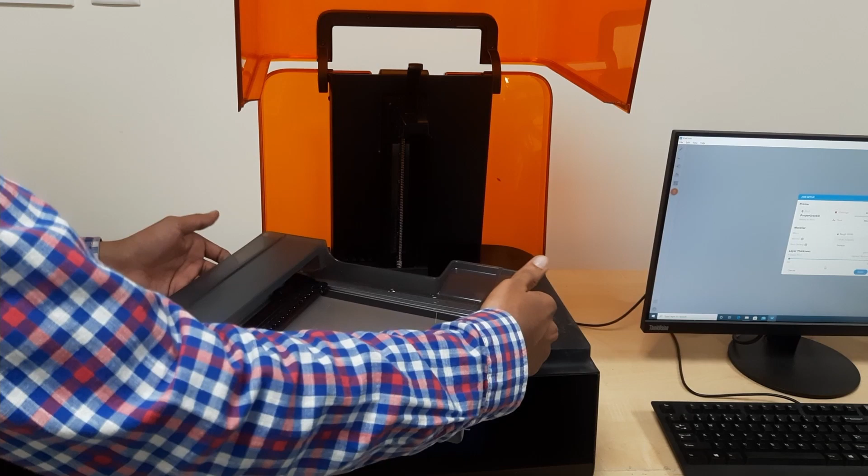Okay, so now we are going to insert this liquid tank inside this printer. You can just simply insert it like this. So now this is the print bed. Next we are going to install this print bed inside this printer. Lock this. So now this is the cartridge that contains the photopolymer, and we are going to install this inside this printer. It can simply slot in like this. Okay, so now the printer has recognized that all these three things are inserted inside this machine, and it is ready to print.

So this is the software aspect of this printer. This printer uses a software which is called Preform. The general sequence of the steps or the general procedure remains the same that we discussed earlier. So you have an STL file, you generate the support structures of the STL file, then you slice that STL file, generate the contours, then select an appropriate area filling strategy, and then you print the part. So overall that sequence remains the same, but the GUI is slightly different in this case.

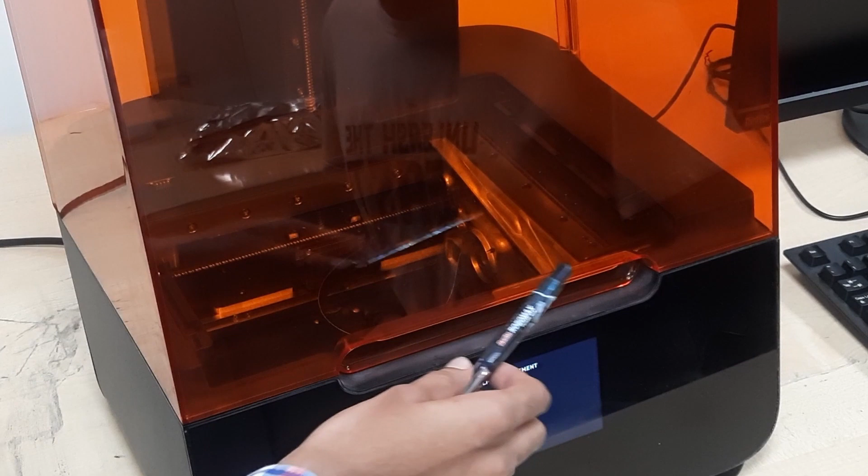Another thing that you can notice is that this is the optics here. This is what does the scanning, this is what actually guides the UV, the ultraviolet laser onto the selective areas to cure the resin. I'll put in a PowerPoint slide here to explain how it works, but basically it has a single galvanometer to provide the motion of the laser beam in the y direction, and then the entire head moves along x. So you have y scanning with the help of the galvanometer mirror, and then you have the entire movement of this optics along x to achieve the scanning in the x direction.

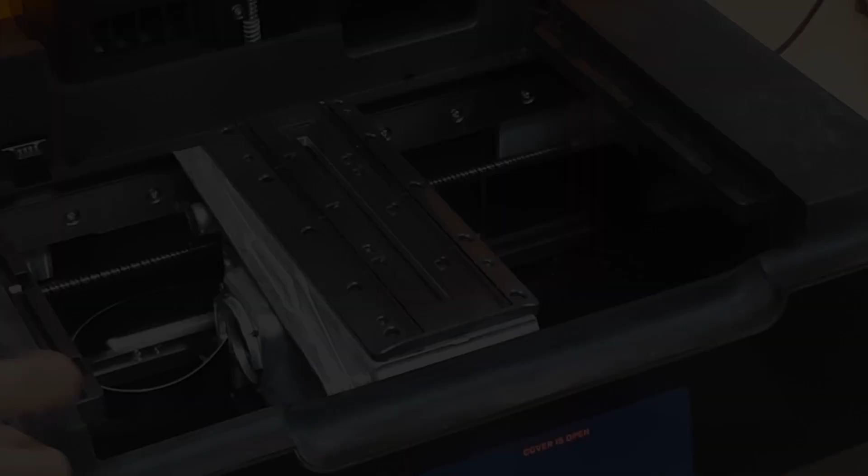Now we have opened this lid so that we can get better access to this scanning unit. You can see that this entire thing is the scanning unit, and this entire scanning unit moves along x. This is the ball screw which guides this entire scanning unit along the x direction. But for the scanning in y, we have the galvanometric system, and you can notice that this black part is actually the galvanometer. So the laser comes from the top, then the laser is guided onto the galvanometer, the mirror tilts, and then it deflects the light upwards. And then we have this narrow slit. Through this narrow transparent window, the light comes and it projects onto the photocurable resin.

Another thing that you can notice is that the scanning unit has two rollers here. These rollers slightly press on the flexible tank that we have, and it slightly bows the flexible tank upwards. That helps in the peel away process, or the removal of the part from the optical window. And this technology is called LFS technology, or low force stereolithography technology.

So in order to have a better understanding of the Formlabs stereolithography apparatus and its light processing unit or scanning system, let's look at this presentation. Here you can see that this is the light processing unit, or the scanning system of the Formlabs SLA. This transparent glass window that you see is the window from which the UV laser projects onto the print bed. If we were to look inside this light processing unit, we will find four key components. The first one is the laser. This is the UV laser. The second one is the galvanometer. The third is the fold mirror.

And then finally we have this parabolic mirror. So this laser light which comes from this unit is directed onto the galvanometer. The galvanometer appropriately tilts and then reflects it to this fold mirror. Subsequently, from the fold mirror, the laser beam is reflected to the parabolic mirror, and from the parabolic mirror, the light is reflected onto the transparent window from which it emerges out and then projects onto the print bed. The motion of this galvanometer controls the scanning in only one direction.

Let's assume that it controls the scanning in only Y direction. For the scanning in X direction, this entire light processing unit traverses, it moves back and forth on this lead screw. So one can think of this light processing unit or this scanning system as a hybrid scanning system where we have the galvanometer to achieve scanning in one direction, and we have the flying optics which achieves scanning in the other direction.

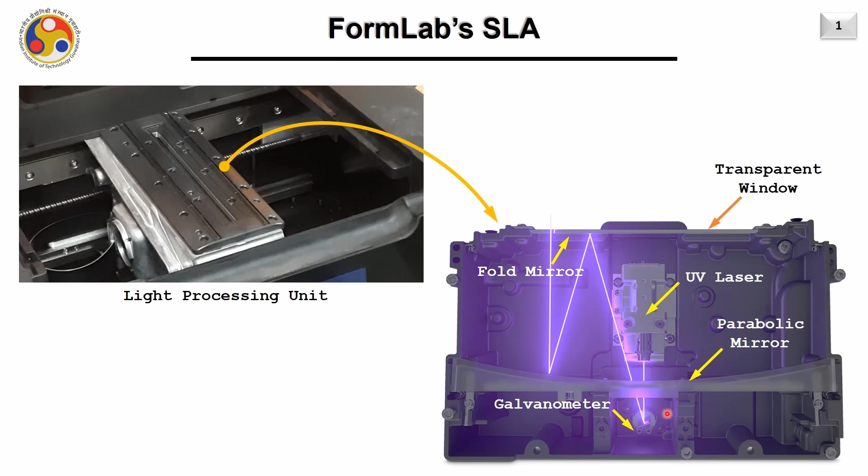Also, this parabolic mirror ensures that there is no beam distortion when the laser beam emerges from this transparent window and projects itself onto the print bed. So this parabolic mirror ensures that this laser beam remains perpendicular to the print bed as far as the scanning in Y direction is concerned, which is taken care of by this galvanometer.

So these were some of the parts that we modeled and fabricated. So you can see that we have nested the parts. So several of these parts are placed on the single print bed and they were fabricated all at once. This blue color part you see is actually the part that we want, and then the gray color part is actually the support structure.

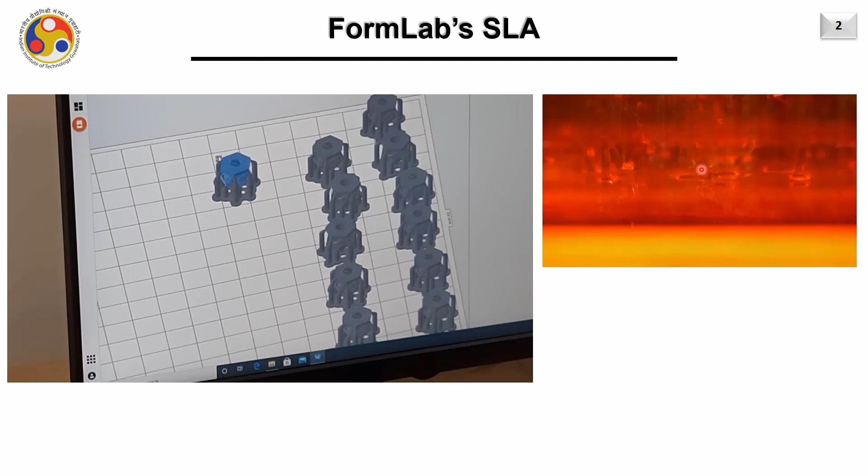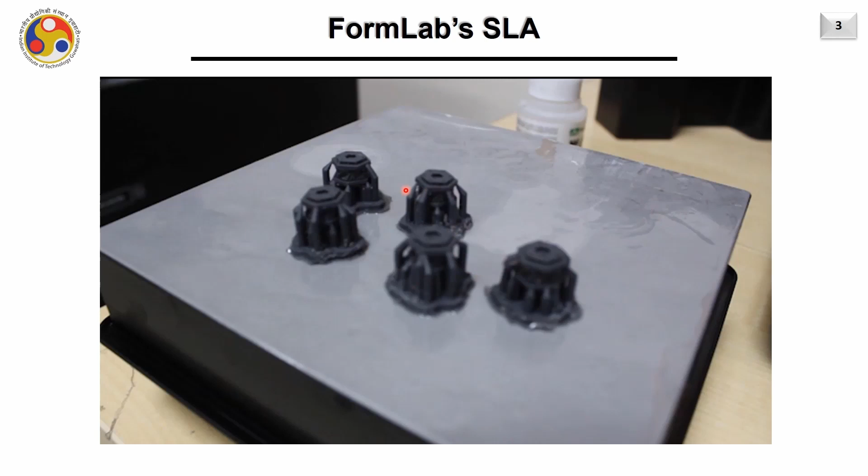So once we have modeled the part and we have set all the process parameters, we send the file to the 3D printer for printing, and here you can see that this is the laser beam which scans appropriately and it builds the part. So these were the final parts that were printed. You can see that this is the build platform and then these are the parts, and these parts were printed upside down. So with this, I conclude this session on Formlabs stereolithography apparatus.

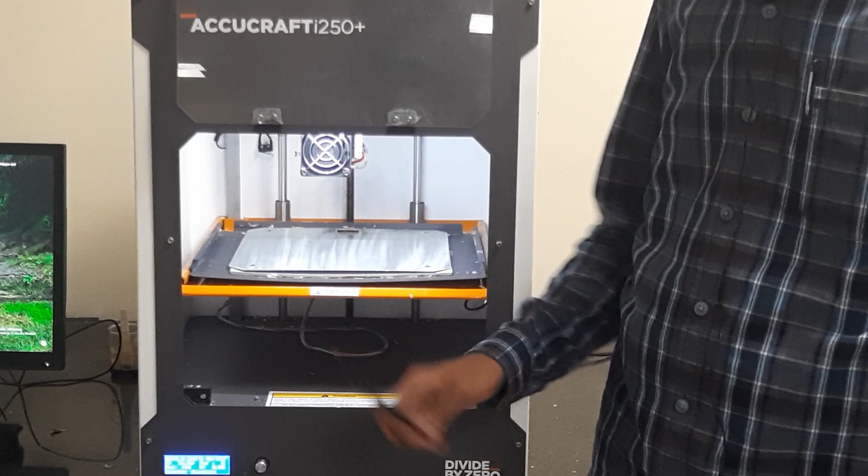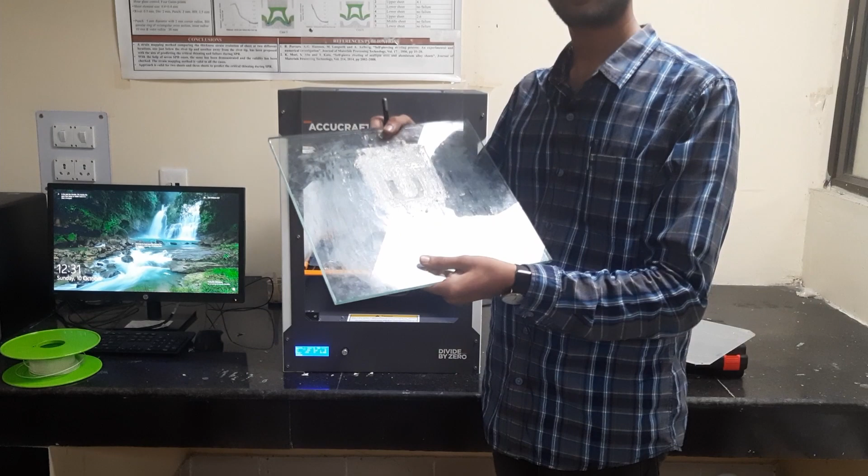And we can also operate this machine remotely. So you can see that this is the X and the Y motion which is associated with the print head. And we can also see the Z motion which is associated with the print bed. Okay, so the print bed is a heated print bed, and this is a glass print bed. I can show you that this is the print bed here. This is a glass print bed on which we extrude the material and deposit the part.

So as we have previously discussed in week 6, these types of 3D printers use wire form of feedstock. So today we are going to be using an ABS feedstock which is in the wire form, and I have that feedstock here. So this is the feedstock. It is in the form of wire, and the diameter of this feedstock is 1.75 mm. So this feedstock is going to be fed into this print head.

So first it is going to go through the pinch rollers, then into the liquefier, and then from the liquefier it is going to be extruded from the nozzle. The nozzle has an outlet diameter of 0.4 mm.

Before we install the print bed, which is a glass print bed, and show you the procedure which we use to ensure that the first layer sticks to this print bed, I will show you how we can load this filament into this 3D printer. To load this filament into the 3D printer, I am going to slightly cut this filament at an angle of 45 degrees so that it will be easy for me to guide this through the tubing.

So to do that, I have a cutter here, and at an angle of 45 degrees, I am going to slightly snip this filament. You can see that now it has a sharp tip, and then it will be easy for me to guide this inside the tubing.

So this is the back side of the machine, and this is the filament spool. I am going to simply put this filament on this spool, and now this filament has to be fed inside this 3D printer. You can see that there is a slight outlet which has a tubing. So I am going to take this filament and feed it inside this tubing.

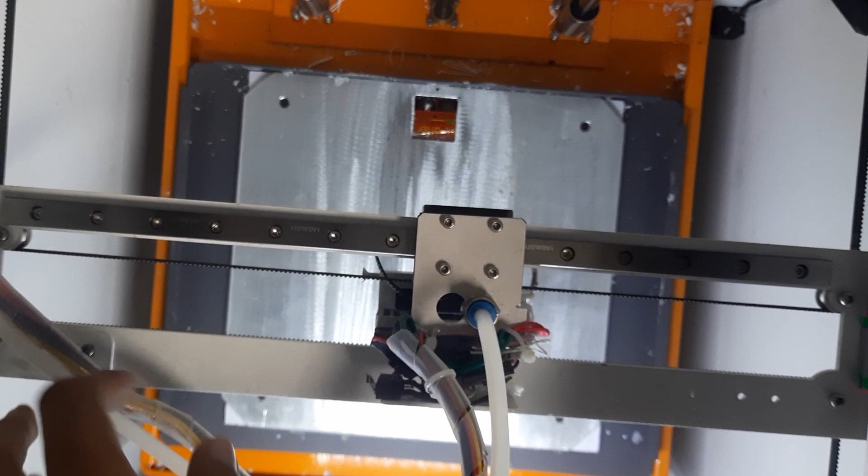So now I am simply feeding it inside this tubing, and I will show you inside the 3D printer. Okay, so this is the spool that I showed you, and this is being fed inside this tube. As I am pushing it, you can see that this white color tube is the tube inside which the filament is actually traveling. This tube is coming all the way, and then it is going inside this pinch roller, then inside the liquefier, and then it will be extruded through the nozzle.

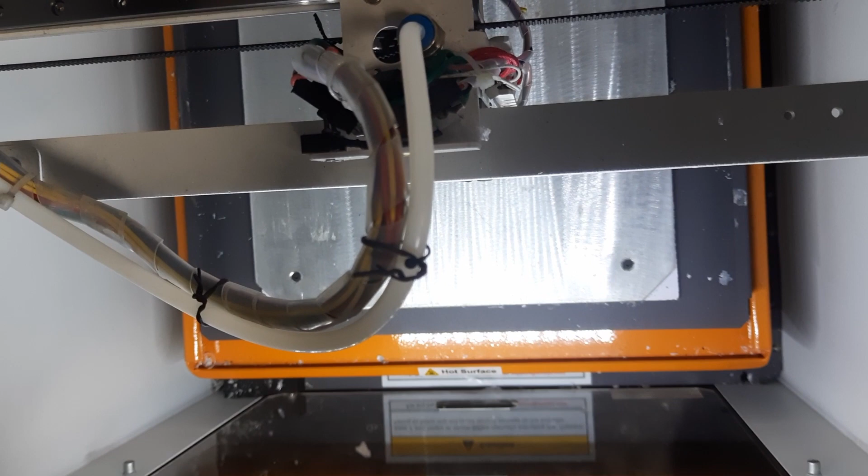So I am simply pushing this, and you can see the silhouette of the filament. It is going inside the tube, and now it has reached the end of this pinch roller here. So now you can see that this is the tube which is feeding the filament inside the pinch roller, and then the pinch roller is going to guide it inside the liquefier, and you can see that this is the pinch roller.

If I push on this lever, it is going to release the tension on the pinch roller, and as the tension is released, I can easily guide this inside the liquefier. I will perhaps explain this through a PowerPoint, but for now let's simply push this lever here, and as I push on this lever, I will keep feeding the filament inside the liquefier. So I am going to push this.

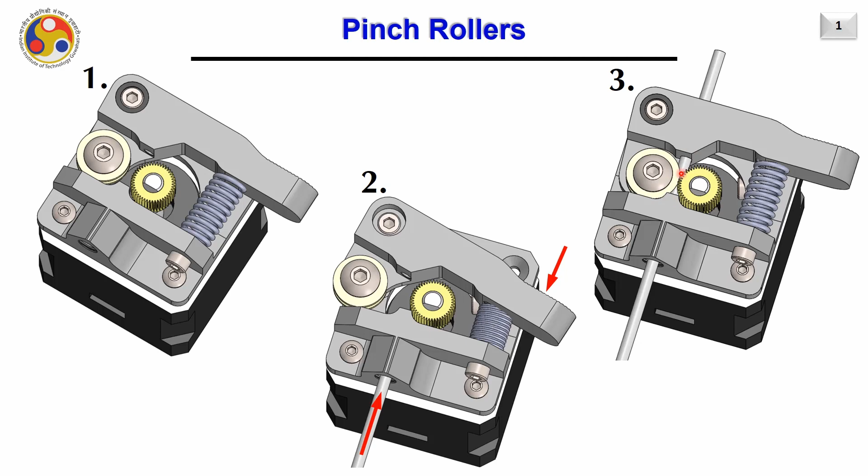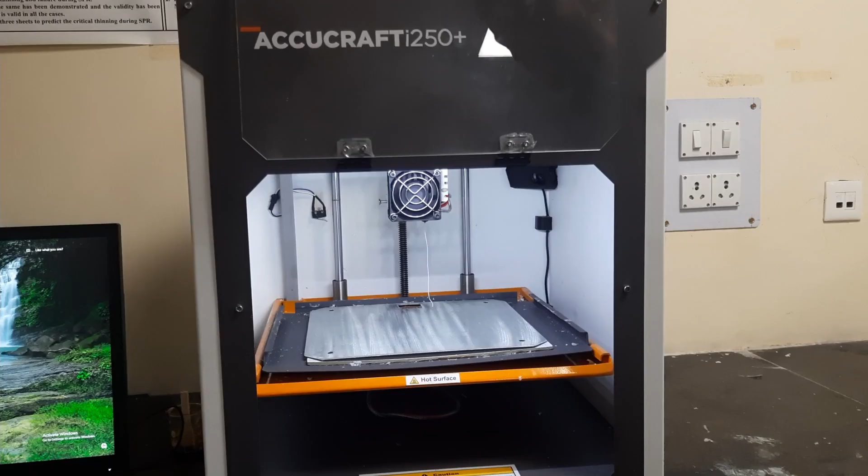Okay, so now we are back to the front of this machine, and the filament that I kept feeding from where the spool was mounted, as I kept feeding it through the pinch rollers, then through the liquefier, and I still kept some pressure on it, you can now see that the filament has extruded from this nozzle, and this is one of the strands of the filament. You can see this strand was pushed out at the end of the nozzle.

So one thing to note here is that this print nozzle is already heated up to a temperature of around 250 degrees centigrade. That is the reason I was able to take the filament, which was of 1.75 mm diameter, and easily push it through the nozzle, which has an outlet diameter of 0.4 mm.

So next we are going to show you the process of preparing the print bed. So it is a glass print bed, and we prepare a slurry of ABS mixed with acetone to ensure that the first layer of the print sticks to the print bed. So this is a slurry which is made from scraps that were generated from the previous print. So usually the support structures which were there for the previous print, we use those support structures and we mix them with some acetone to prepare a slurry.

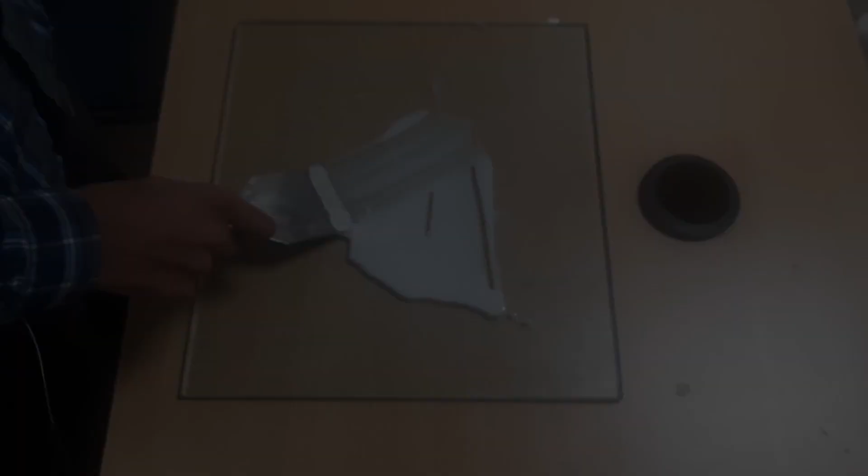Now this slurry is going to be spread onto this print bed, and this is going to ensure that the first layer of the print sticks to this print bed. And then I am going to use this scraper to spread the slurry evenly across what I think is going to be the print area. So now I have spread the slurry onto the print bed. So the next step is going to be to install this print bed onto the machine.

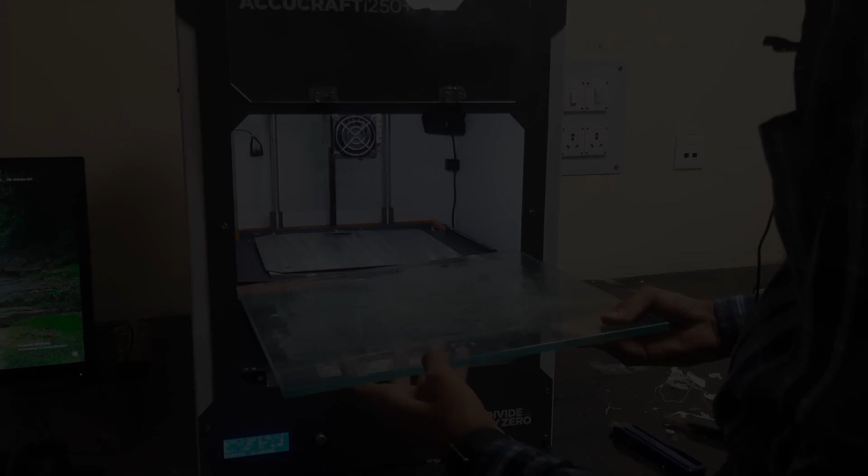And so this is the heated bed, and I am going to install this glass plate onto this heated bed. And now we are ready to use this machine for printing. So the part that we are printing is actually a pulley. So it is designed in SolidWorks. Then we have used the Cura software, which has already been explained to you. So using that Cura software, we have prepared the G codes, and now we are going to send the G codes to this machine for further processing. So after the part is printed, we will come back and we will see how the part looks.

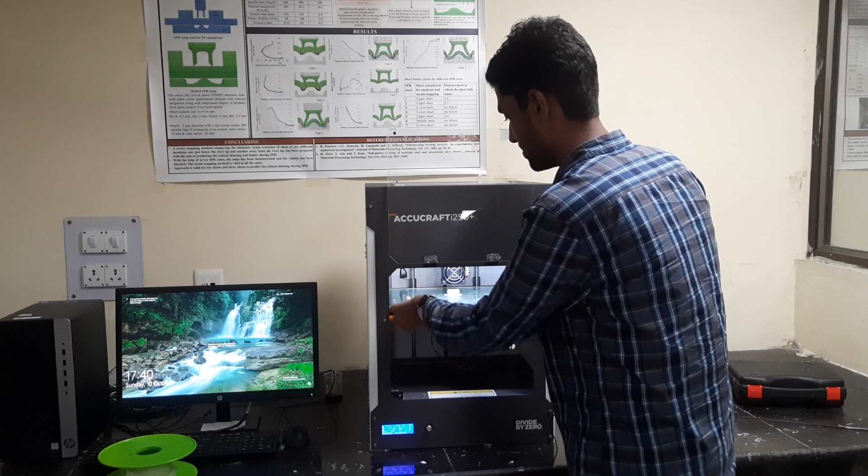Okay, so after 1 hour 45 minutes of print time, the part that we started printing has now completed. So I am now going to open this printer and take the print out. So you can take the entire print bed out like this. So this is our small print, and using this scraper we can take this print out and examine it.

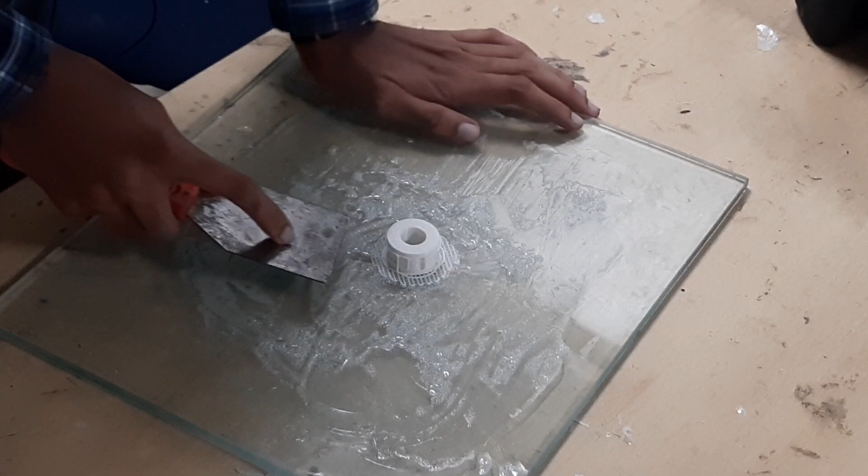Okay, so the print has easily come out, and now you can see. So this is the raft or the brim which it deposits before actually printing the part. This is deposited, and then on top of this the printing is done. So this is the pulley.

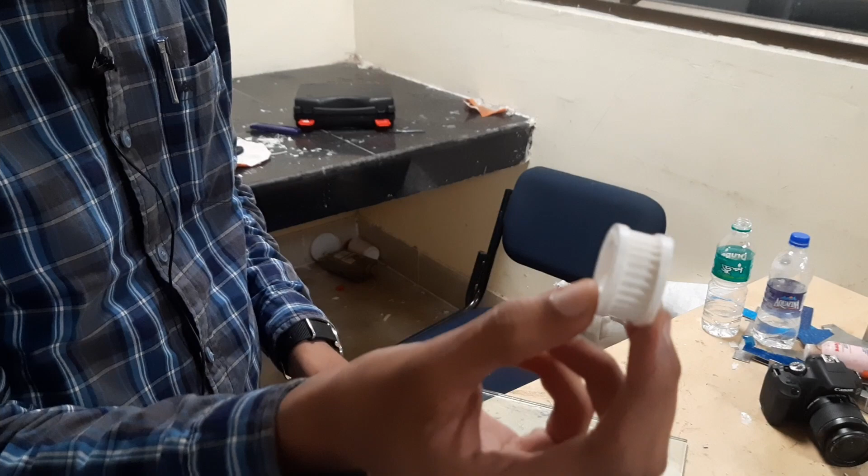This pulley currently has some support structures on it, so we are going to remove these support structures and show you the final part. Okay, so now we have removed the support structures that were printed in order to support the overhang features. We have cleaned the support structures, and this is the final part. So I'll share some of the images of this final part at the end of the video.

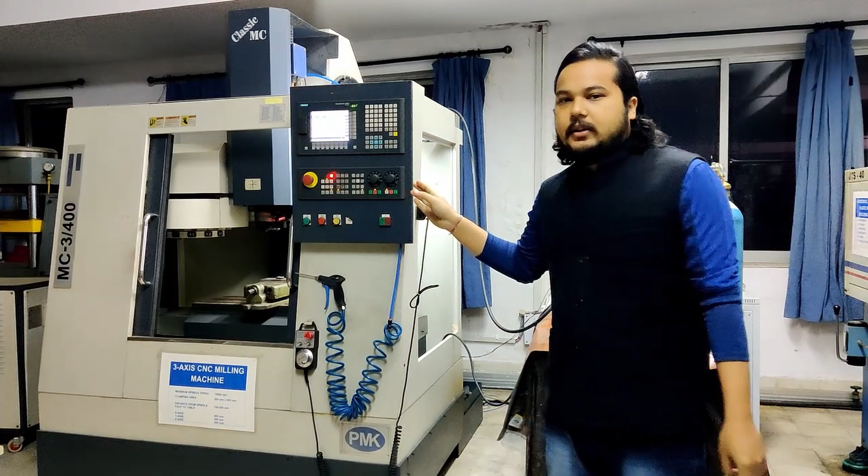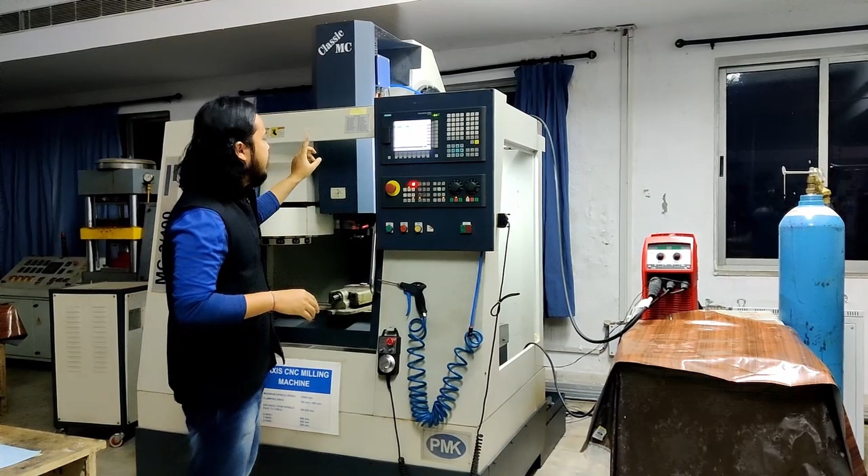Its deposition part has been governed by a CNC machine, which is a 3-axis machine. So here you can see its 2 axes are given to the bed, that is X and Y, and the Z motion is given to the CNC head, and the deposition torch has been attached to the CNC head. And it's not necessary that you have to use a CNC machine only. We can even use robotic arms or robotic manipulators to govern the XY motion of the deposition nozzle.

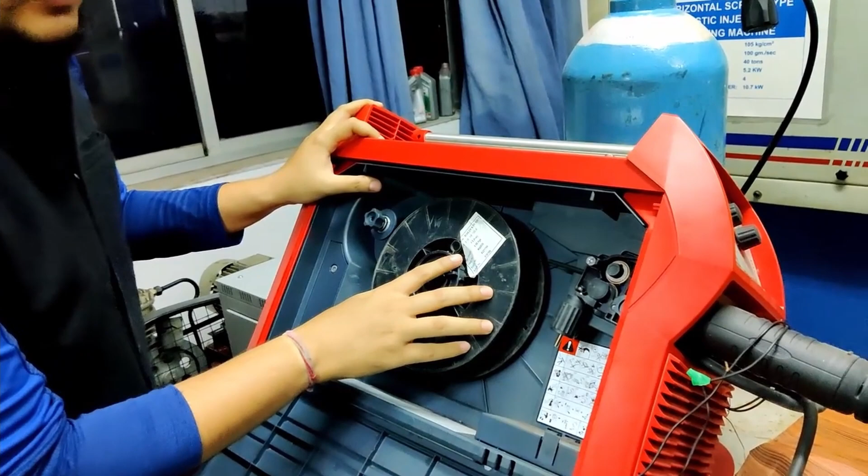So here we are using a mild steel wire of 0.8 mm diameter. This is the deposition unit that we are using in this wire arc setup. So this is the Fronius module, and this is a gas metal arc welding unit. So here you can see the feedstock material, which comes in the form of wire on a spool. You can see here this is the spool of the feedstock material, and this is the pinch roller through which the wire will be fed.

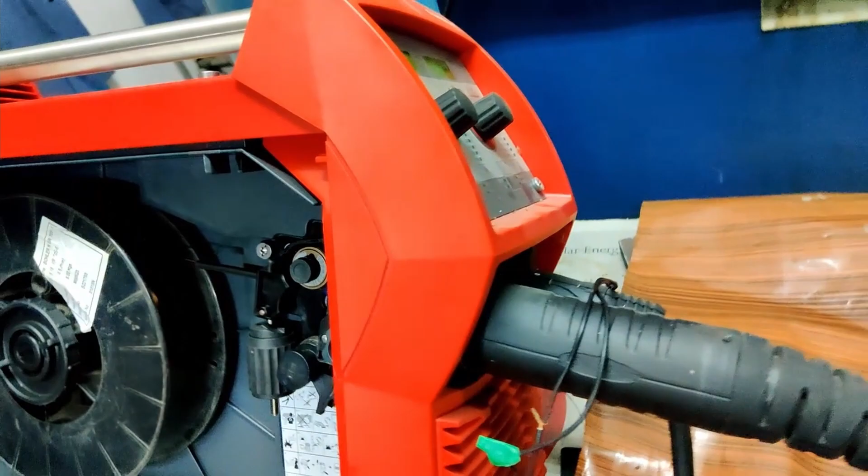You can see this mild steel feedstock material passes through these rollers, and this roller is rotated with the help of stepper motors, and it will pass through this hose pipe and finally be provided to the deposition torch. So now we can fix that roller like that. You can push it over here and just press it. It's now locked. And let's move to the other controlling panel.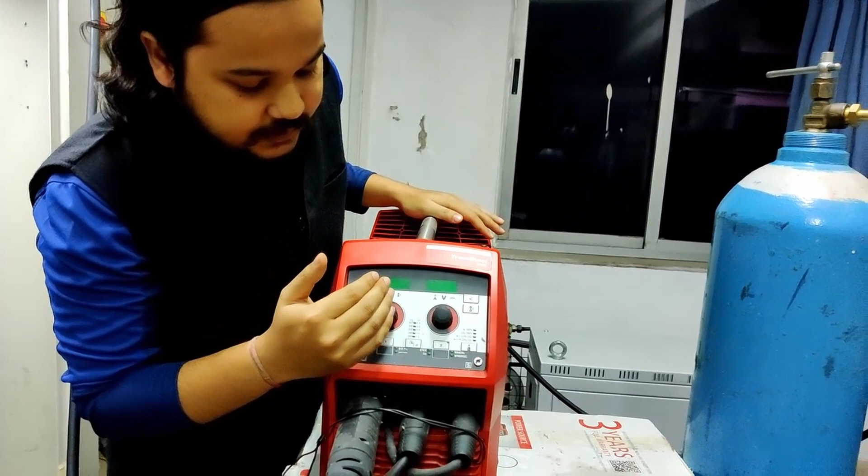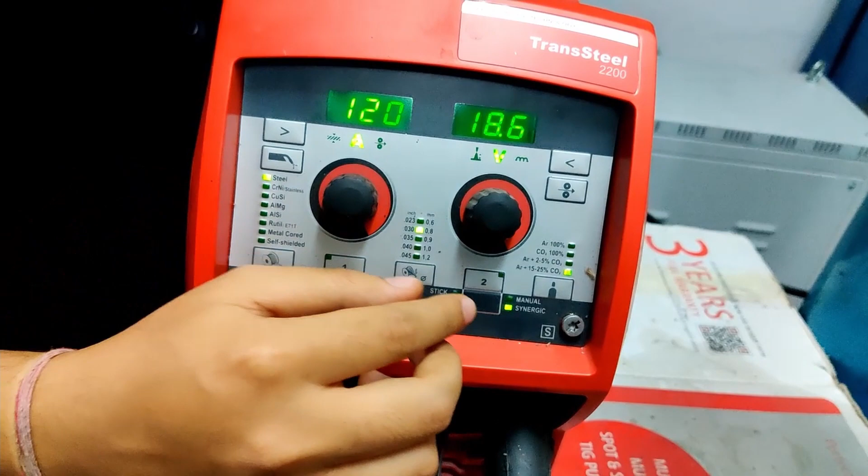So to switch on the deposition module, there is a switch on the back side of the machine. We will switch it on, and now you can see here it has two display units. There are two modes of operating this machine: one is manual mode and another is synergic mode. In manual mode, you have to adjust every parameter manually, while in synergic mode, based upon the material that you are using, the machine will automatically adjust the other parameters if you set one parameter.

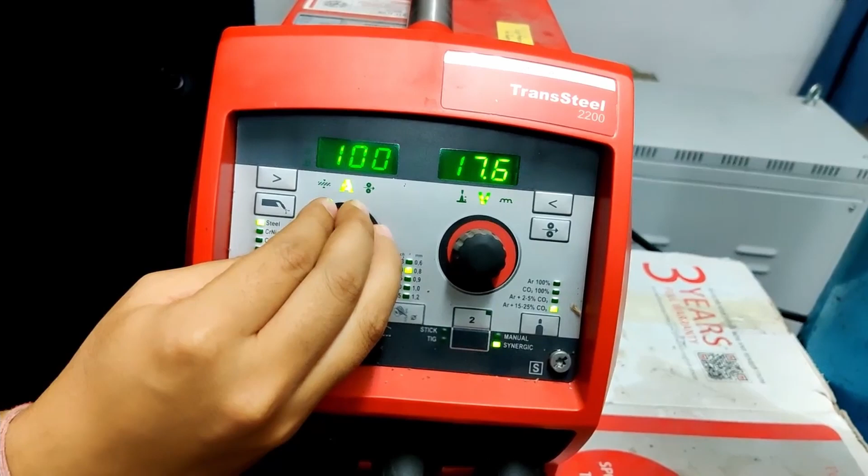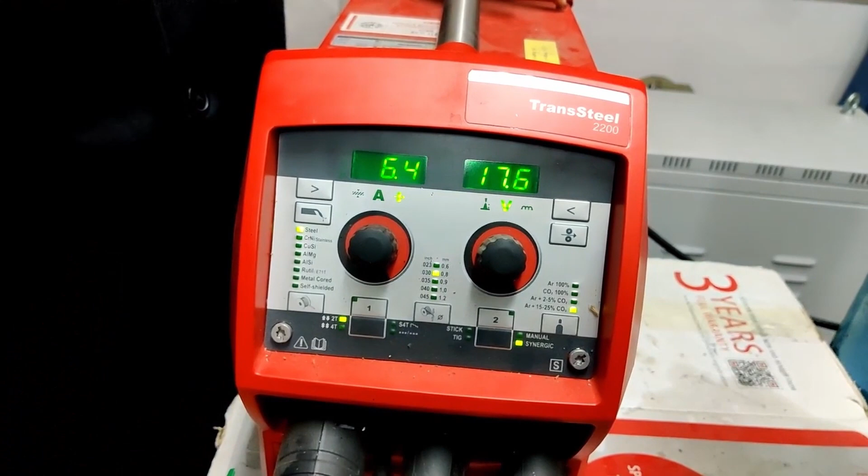Like here, if you are running this machine at a constant current, suppose you are maintaining the current at 100 ampere, you can see the voltage has been adjusted accordingly. Similarly, the other parameters such as wire feed rate can be adjusted automatically. Here at 100 ampere, you can see the wire feed rate is 6.4 meters per minute. If I increase the current to, say, 130 ampere, and go back to the wire feed rate, you can see it is now 9.1. So this is the advantage of running the machine in synergic mode.

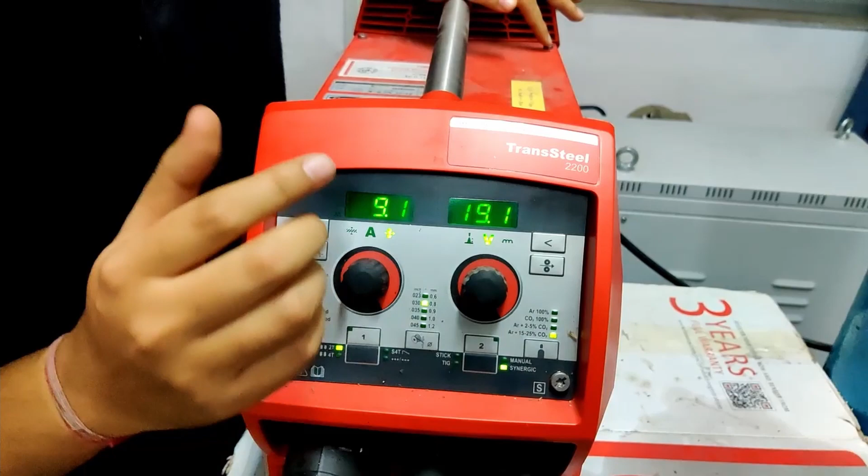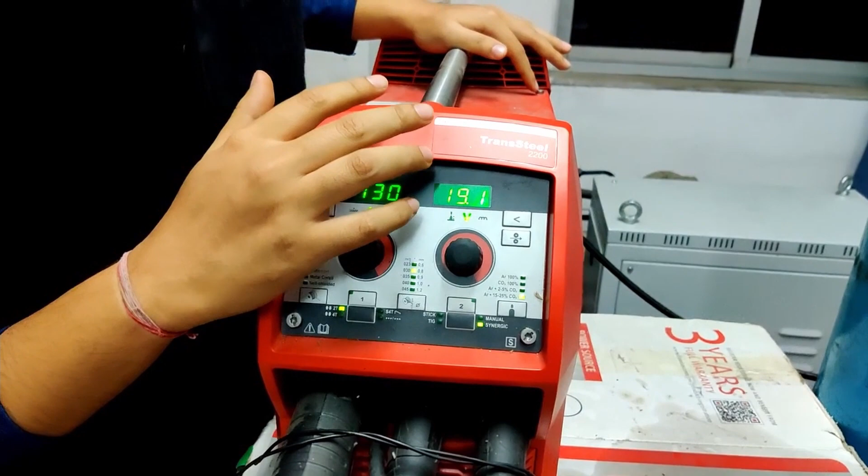Then finally, for running the machine in synergic mode, you have to give input to the machine controller about what material you are using. For that purpose, you have to select the material of the feedstock wire that you are using. Here we are using a mild steel material, so you have to select the option steel. Then the diameter of the feedstock wire is 0.8 mm, so we have set it to 0.8 mm.

Then the shielding gas we are using is a mixture of argon and CO2. It consists of 80% argon and 20% CO2, so we have set that in this parameter. We are using argon for the shielding effect, while CO2 will provide us the cooling effect.

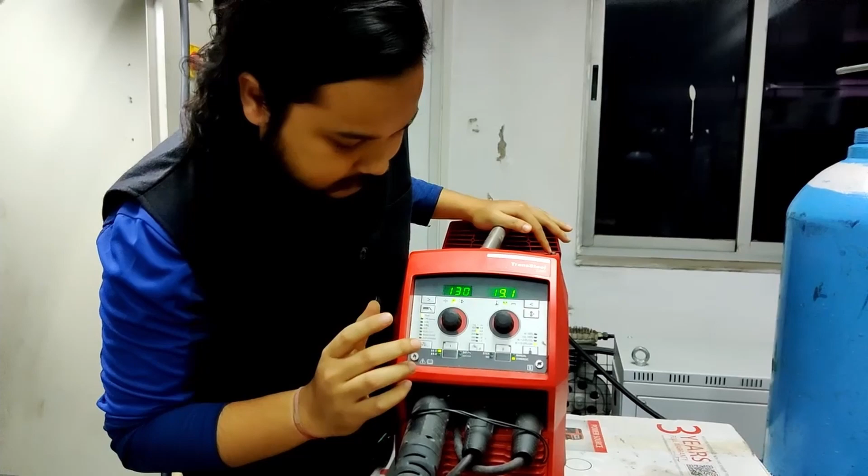There is another mode of operation for triggering the welding switch. These are 2T mode and 4T mode. There are two modes of controlling the torch switch. One is 2T mode, another is 4T mode. In 2T mode, we have to keep pressing the trigger switch to keep depositing the material. Once you release the trigger switch, welding will stop and hence the deposition will be ended.

While in case of 4T mode, you have to press the torch switch once and release it, and then the material will keep going, and the welding will keep going until you press it again and release it. We can consider the 2T mode like an accelerator pedal, where you have to press the accelerator pedal and until you release it, it will keep accelerating. Once you release it, the car will start decelerating.

Similarly, for 4T mode you can consider the switch of your household pump, in which there are two buttons, a green one and a red one. You press the green one and release it, then the water pump will pump water and it will keep pumping until you press the red button and release that button. You can consider it like that.

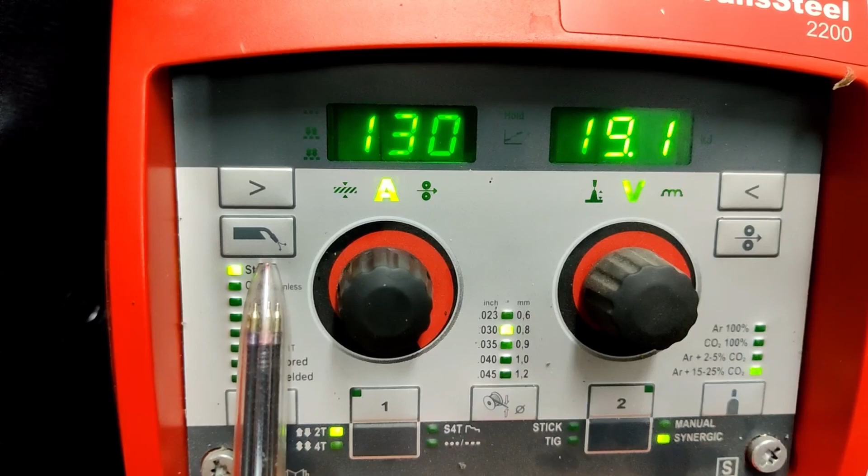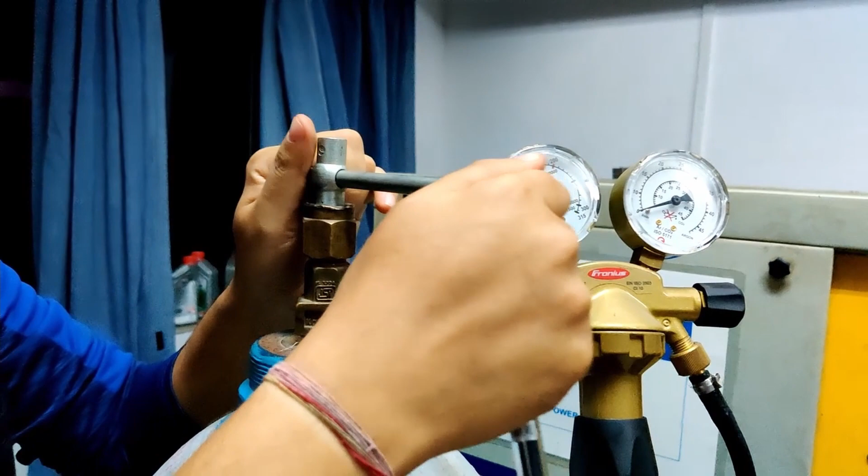To ensure the wire is coming to the hose pipe, there is a wire check button. By pressing that wire check button, we can check if the wire is coming to the hose pipe or not. Similarly, for checking the gas flow rate, you have to use this gas flow check button. This is the gas cylinder that contains the shielding gas, the argon CO2 mixture. First we will open the cylinder with this cylinder key. Then we have to check here.

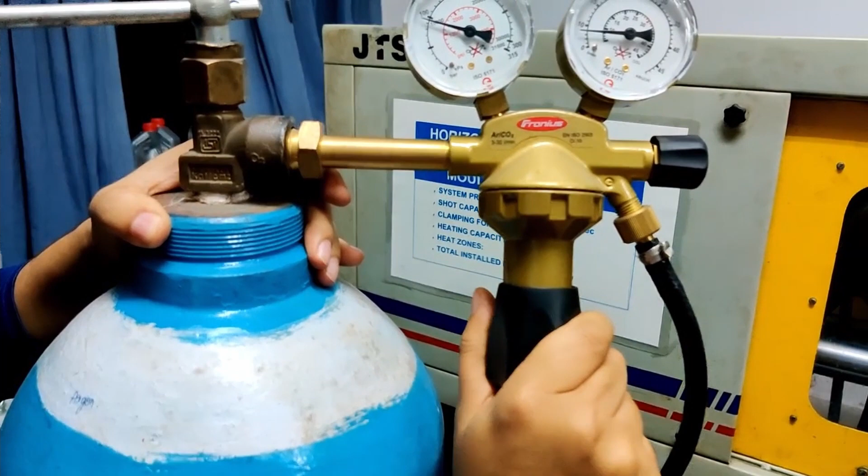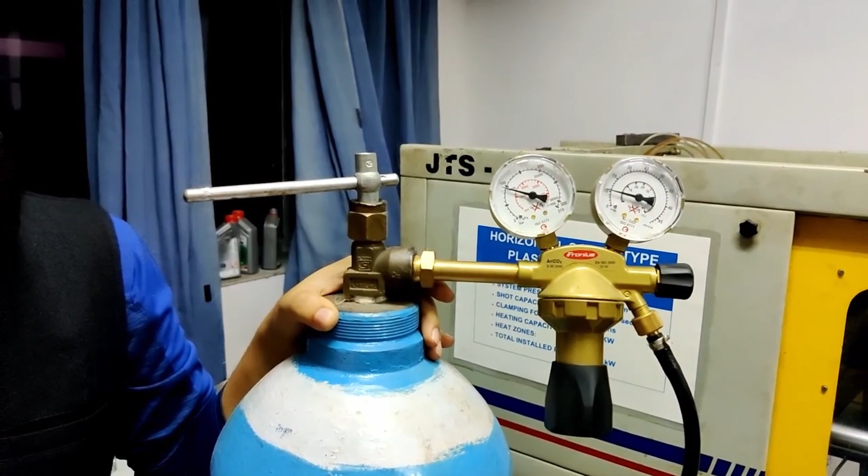This is the gas pressure, the pressure of the gas inside the cylinder, and this is the flow meter. Usually for welding we keep the gas flow rate at 10 liters per minute. You can adjust the gas flow with the help of this knob. Then we'll open it and maintain it at 10 liters per minute. Now we're going to ensure that gas is reaching the welding torch, and we'll also check whether the wire is coming or not with the help of the button we already mentioned.

Here you can see the welding torch has been attached to the CNC head, and we can control its motion with the help of CNC code like NC files. And we are going to check if the wire is coming to the hose pipe or not. So I will be pressing the wire check button, like you can see here. We keep pressing. You can see here it's coming out. And for checking the gas, we have this gas check button. You can hear the sound also. We have to make sure that the shielding gas is coming, because it will affect the weld part.

Here you can see the mild steel wire is coated with copper. That's why it looks like a golden wire. The copper is added to prevent the rusting of the mild steel.

Here you can see we have bypassed two wires from the torch trigger switch, and we have attached these wires to the CNC PLC, the programmable logic controller, and we are controlling this trigger switch with the help of a relay switch. And we have assigned two M codes: one for starting the relay, which starts the deposition process, M51, and another miscellaneous code, M52, to stop the welding process.

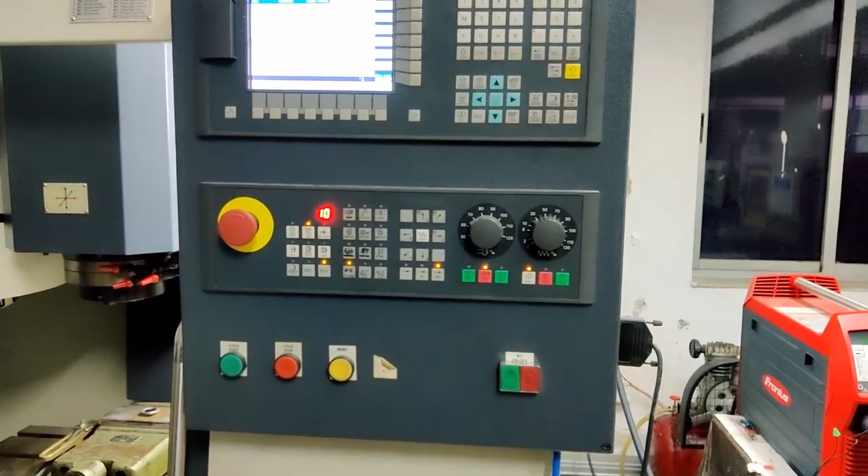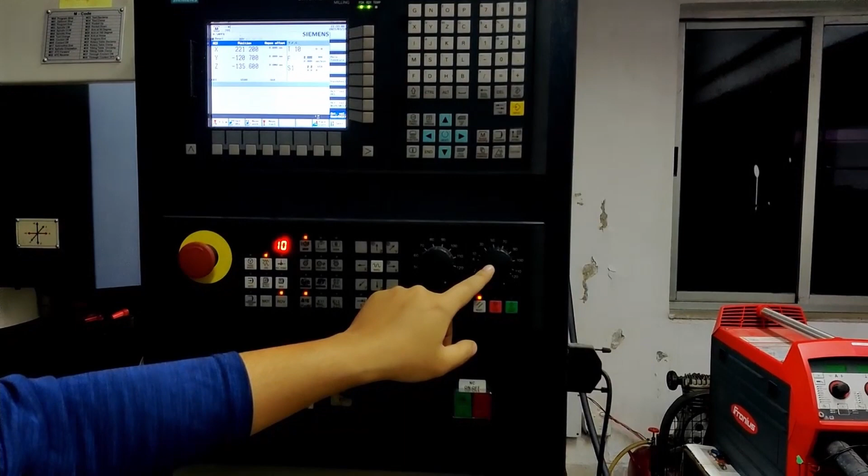We will not go into details in this CNC module, as this has been already covered in the previous video. However, I will just briefly tell you the buttons that will be required for depositing in our setup. Like here you can see the feed can be controlled with the help of this knob, and you can give the NC file through pen drive in this port.

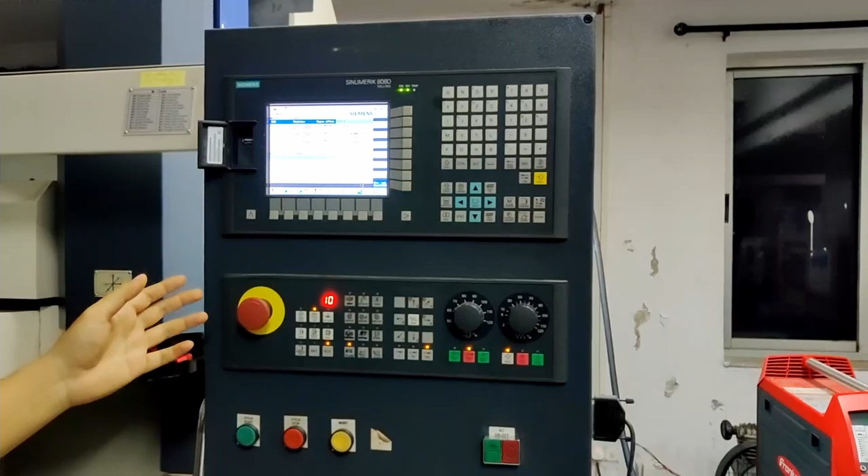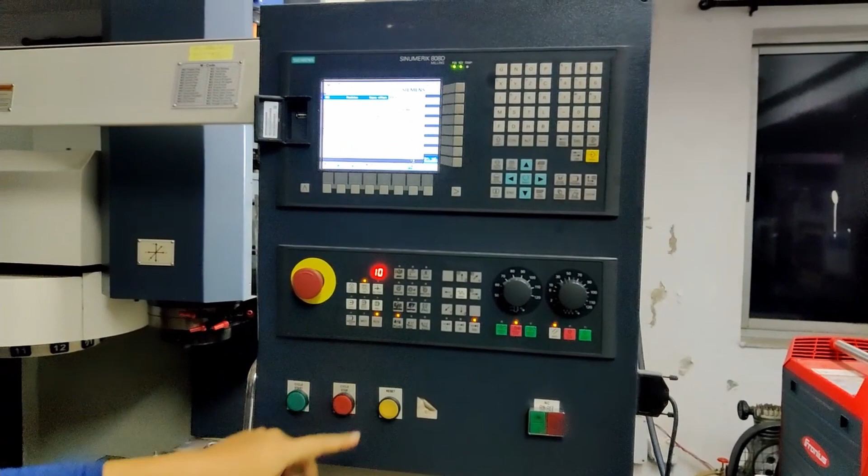You can add this data, and this is the emergency button to switch off the CNC machine if it is heating, or if some emergency arises. You have to just press the button. And as you have already learned, for starting the CNC, first thing you have to do is the referencing. So for referencing you have to use this reference button like that.

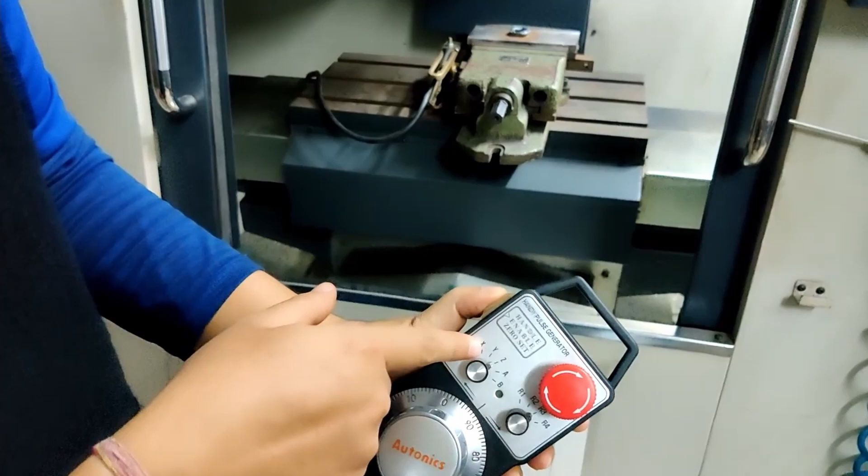So in this machine we can see the X and Y motions are given to the bed. I will show you in the jog mode. This is the handheld unit, or you can say HHU. So here you can see all the axes are given like X, Y, Z and A and B. X, Y, Z corresponds to the X axis, Y axis and Z axis, while A and B are attached to the

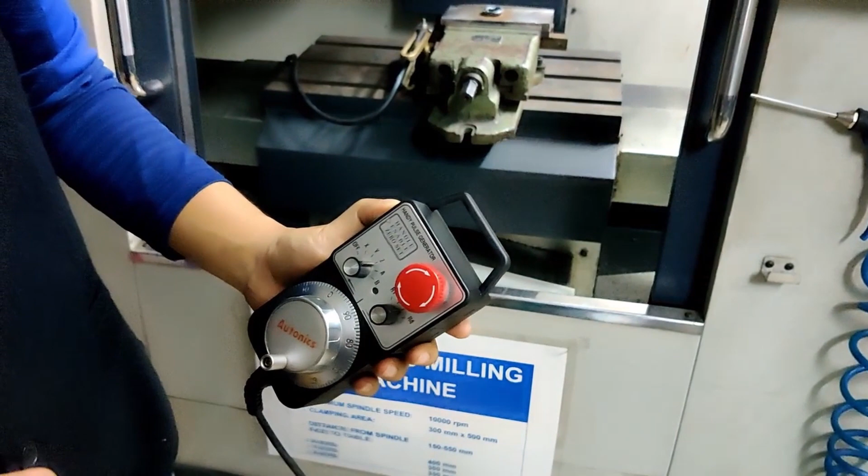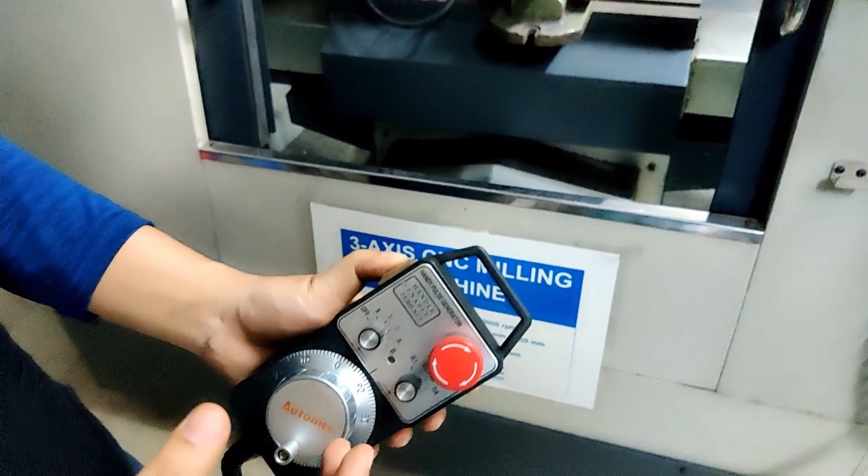used for rotation of your bed, like in higher axis or higher kinematics you will use these axes. However, in this case we are using 3 axis only, so we will not go in details. And here also you can see there is R1, R2, R3 and R4. This corresponds to the speed of movement.

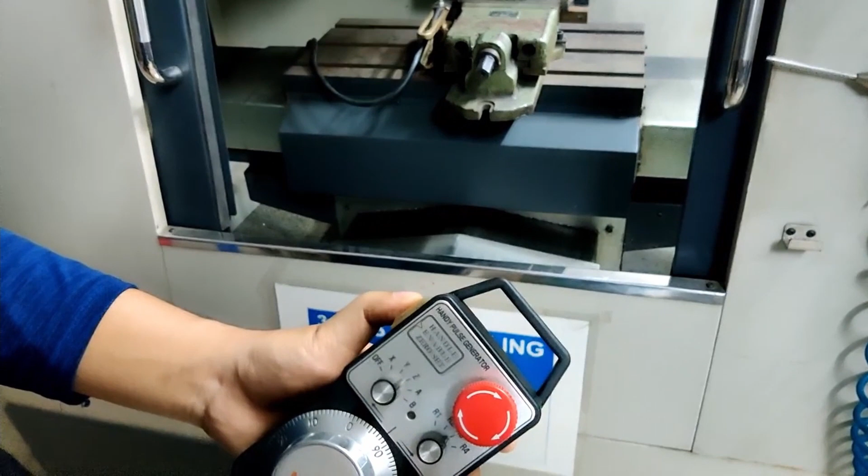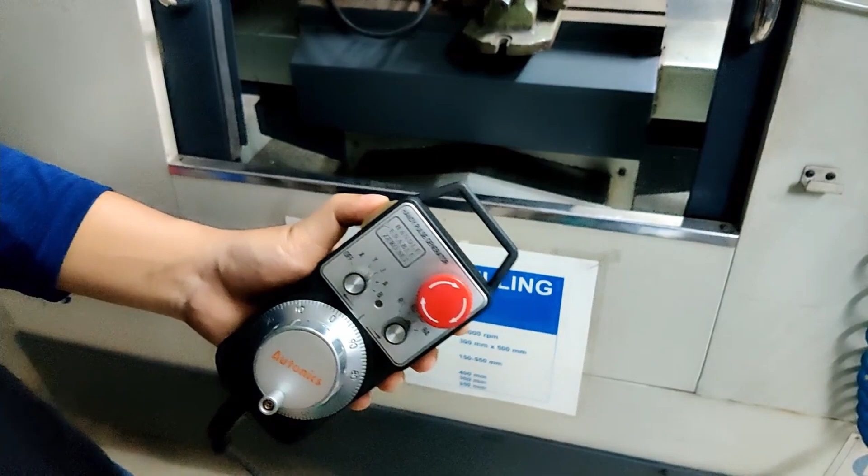With R1 we can move the axis in the scale of microns, 1 micron. In R2 we can move at a faster rate, say 10 microns per step. And in R3 we can move at 100 microns. Now I will move the x-axis. So you can see I've set the knob to be x-axis, and I've kept the movement speed to R3, that is nothing but 100 microns.

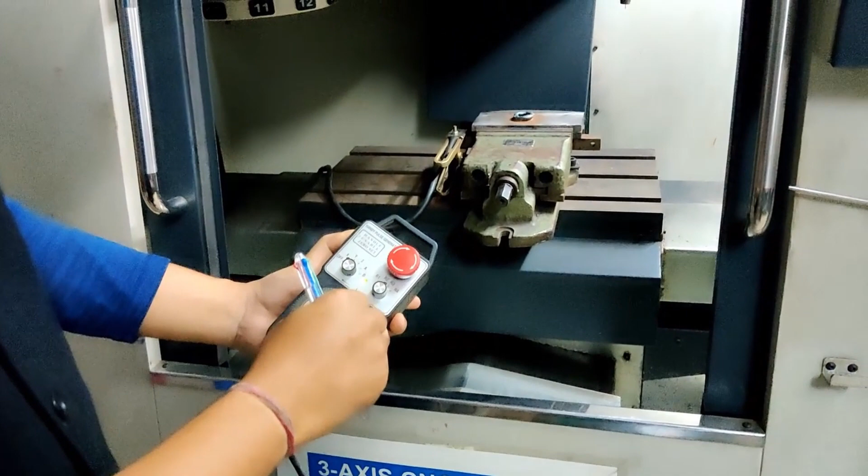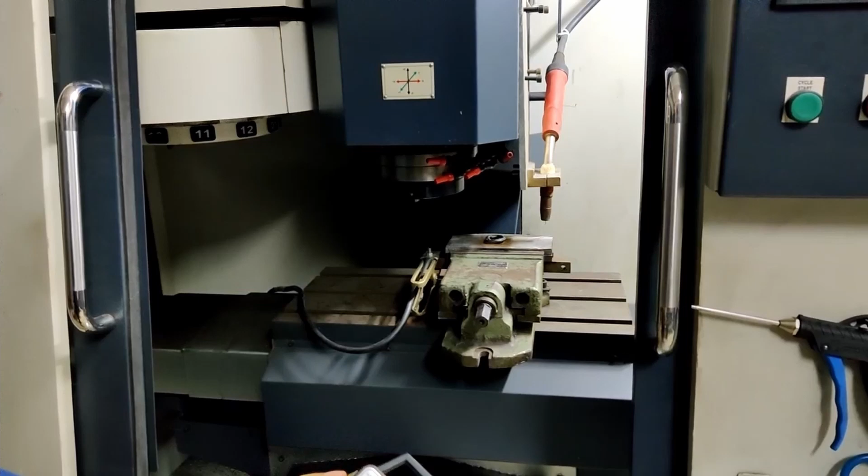So you can see the bed, I'm moving it in anti-clockwise direction and bringing it under the deposition torch. Then we can bring the z-axis below, and now we can set the work coordinate system, and you can store it in the work offset. Those who already know NC coding, G54, G55 up to G59 are used to set the data related to the work coordinate system only.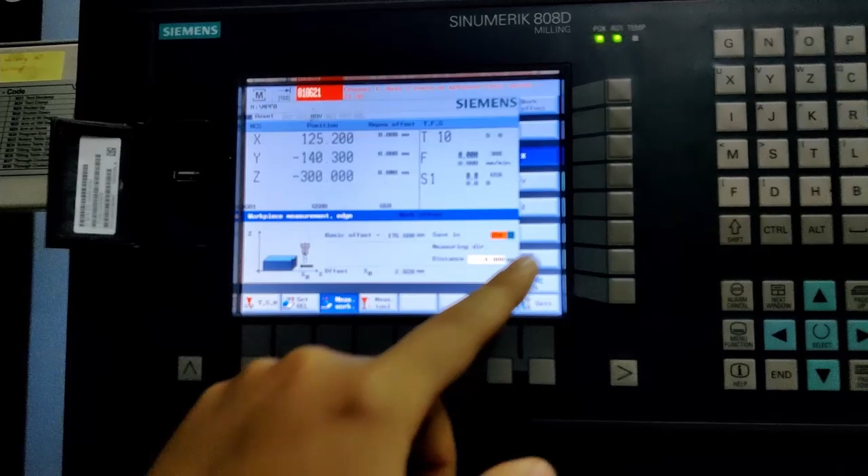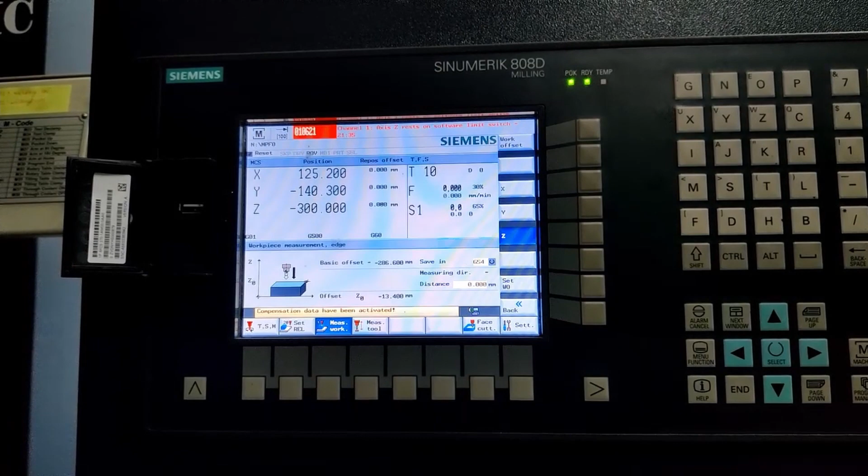Here you can see it's showing G500, but we want to store in G54, so I will change it to G54. And now at that point I want to set the origin of my work coordinate system. So here I will set X, and set work offset. Then similarly Y and Z. Hence, if I import the NC file, run the code and add the G54 command, it will consider that point as the origin for my work coordinate system.

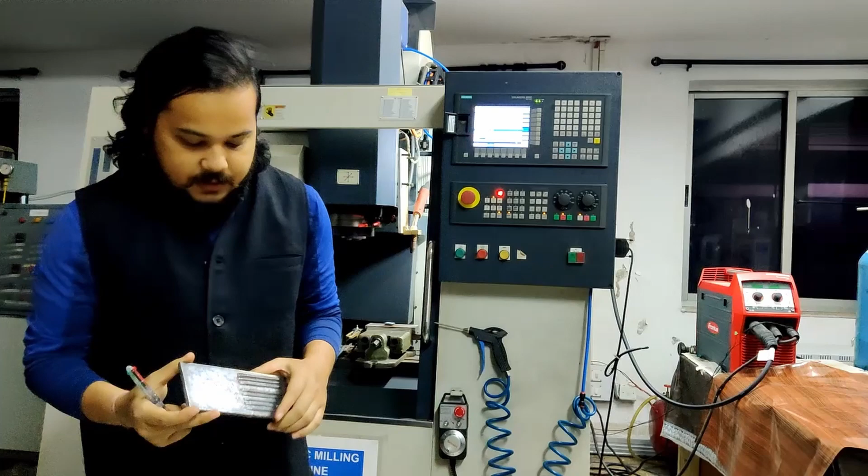For depositing in wire arc additive manufacturing, first we need to perform single bead experiments. Here you can see these are the results of the single bead experiment. We deposit the beads at different parameters, say different current, deposition speed, wire feed rate. And you have already read in welding that for different current or different deposition rate, we obtain different bead profiles. So to optimize that, we need to perform this single bead experiment.

Based on the result of the single bead experiment, we next perform the multi-bead experiment to find out the optimal overlap. After the results of the multi-bead experiment, we go for the multi-layer experiment, and finally we optimize all these things and obtain the final 3D model.

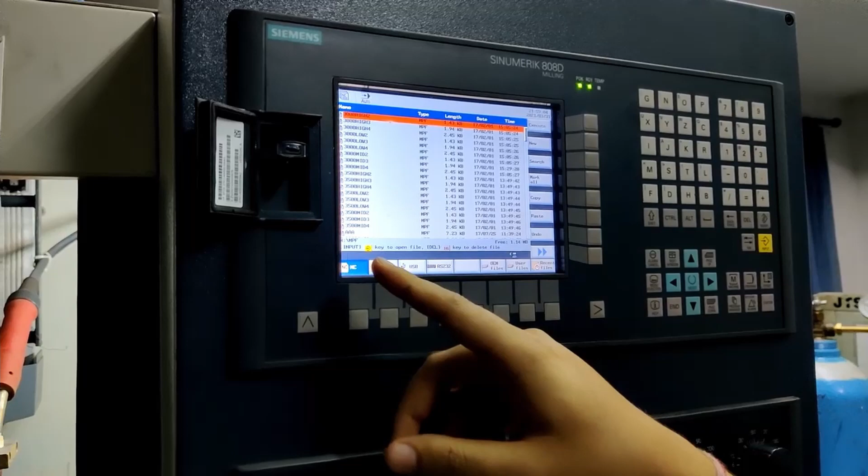We generated an NC file for a spiral infill, brought that code on this pen drive, and fed it to the machine controller. We generated the code using a commercial CAM package like PowerMill, creating that part directly from the mill package.

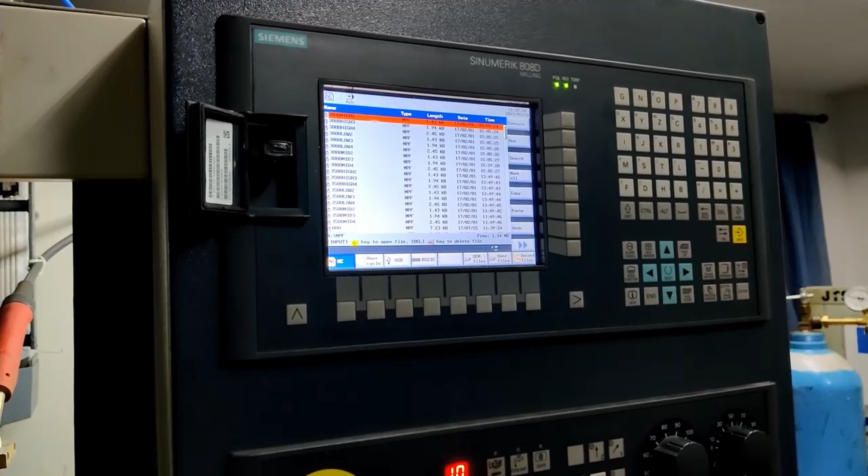So we have to do some post-processing: whenever we encounter G01 or G03, we incorporate M51, which is nothing but the welding on command, and before encountering G00, we add another block of code with M52 to stop the welding.

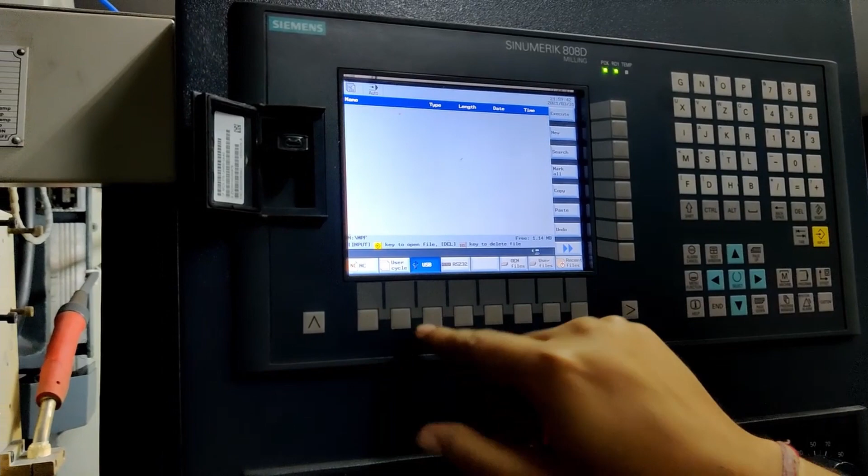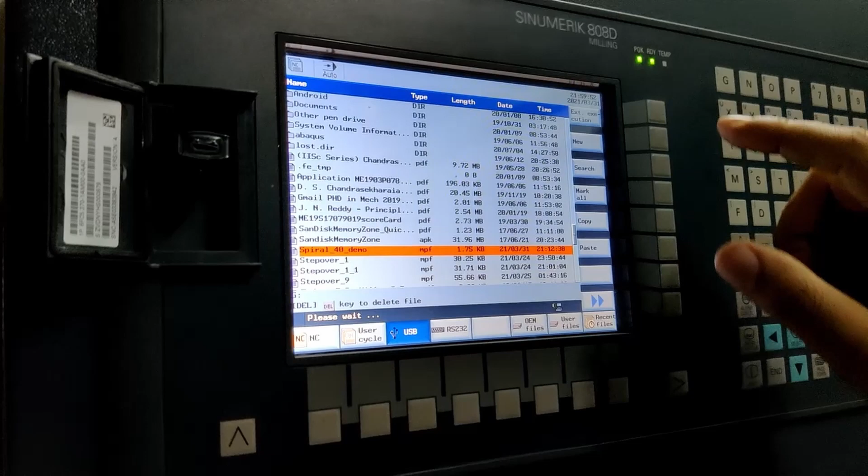So here we have inserted the USB drive. Now you go to the USB drive by pressing this button. Then the documents stored in the USB drive will pop up. We just press the execute button, and it will be loaded into the machine controller. Now we are going to execute this file.

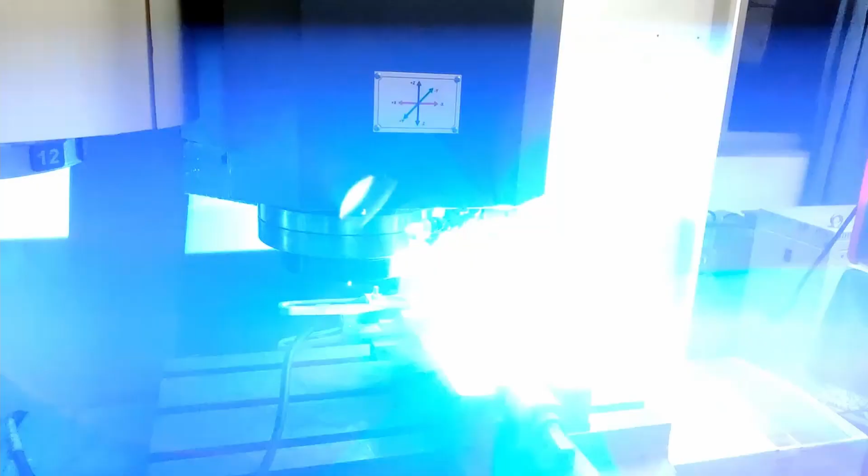So we are going to start the deposition. We press the cycle start button, and we can see the deposition. Here we have set the current to 120 amperes, and the gas flow rate is set at 15 liters per minute. Here you can see it's filling a circular cross section in a spiral pattern.

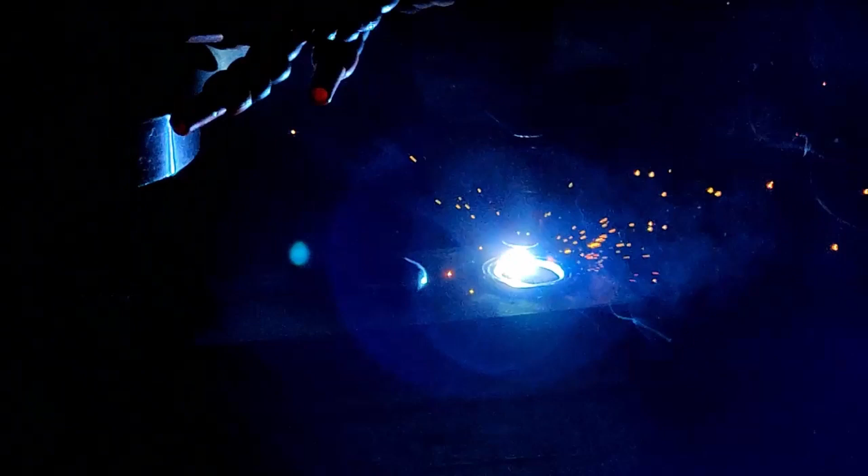So you can see we can realize a very large layer height, like 4 mm or 3 mm. To realize such a height in SLM or SLS, you have to spend around half an hour, but here we can obtain it within half a minute only. So this is the layer we have just deposited.

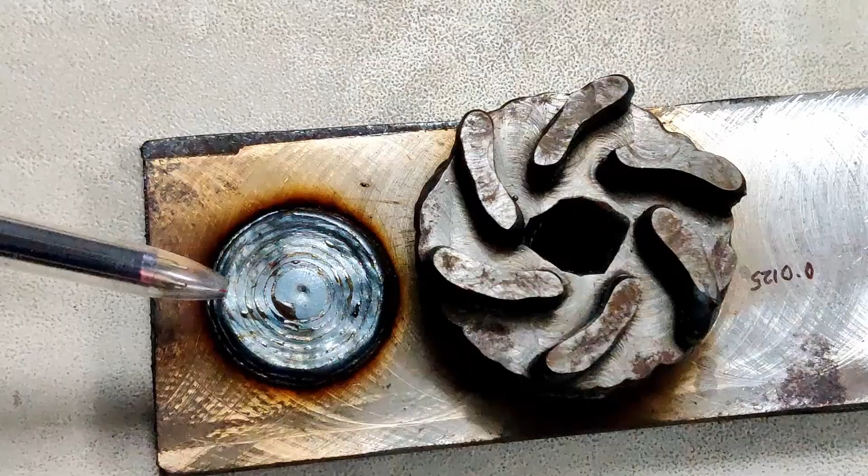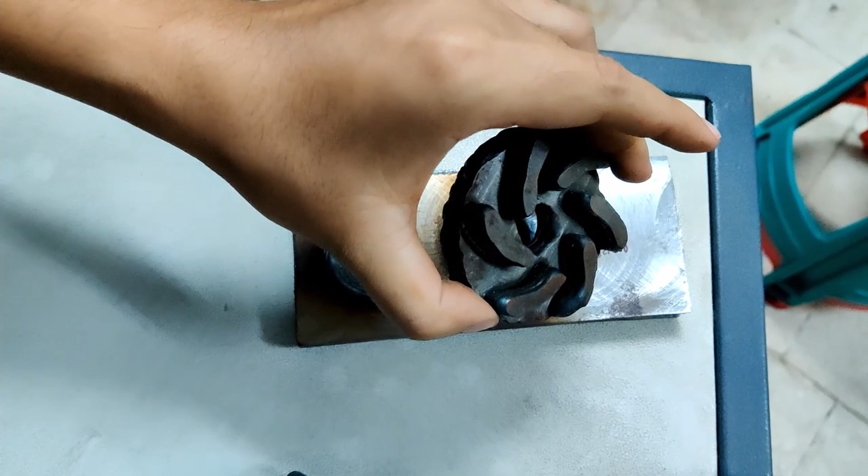You can see it gives a very fine finish, and you can obtain a near net shape at a very fast rate. We have made this impeller using this setup only, and you can see the impeller blades as well. We manufactured this object within a time span of around 15 minutes.

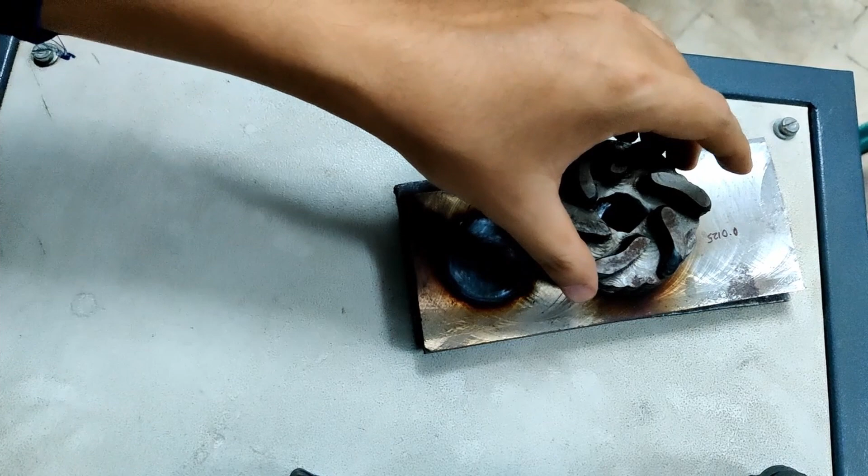To realize such a large object in other processes, say SLM or SLS, it will take around 2 to 3 hours, because its thickness is very high, like 20 mm, and depositing 20 mm in other processes easily takes 2 to 3 hours. As you can see, we have obtained the near net shape of the impeller through this wire arc additive manufacturing process.

To obtain the final shape of the finished product, we have to perform some finishing operation. The advantage of using the WAAM setup is that we can directly perform this milling process in the CNC machine itself, as you have already seen in the previous lecture how to perform CNC machining.

And the major advantage of using WAAM is that we can take advantage of both additive and subtractive manufacturing. If you realize this object with purely additive manufacturing, it will take a lot of time.

But if you realize the object entirely with subtractive manufacturing, like milling, there will be a lot of material wastage, and it will take around 20 to 22 hours. With WAAM, we can realize the entire object within a short span, like 4 to 6 hours, including the machining process.

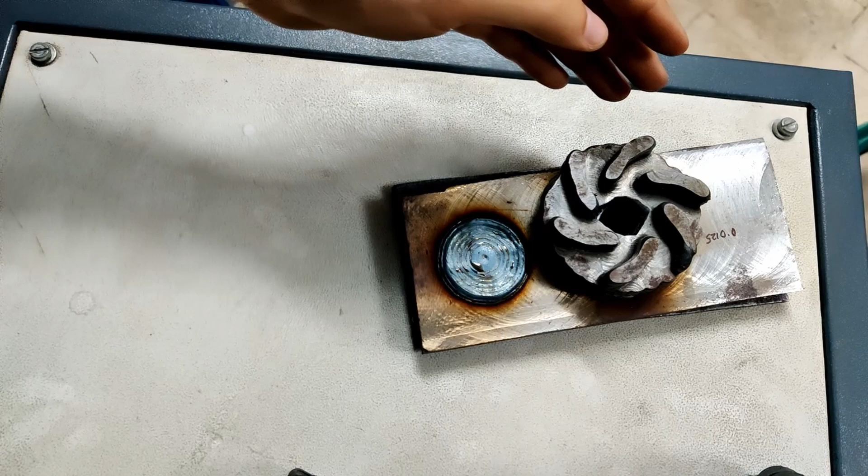Because if you go for milling, you have to make this entire component from a cylindrical object and remove the material. And as you have already noticed, total automation is not possible in CNC machines. But in this case we can achieve that, and we can save a lot of material.

In the literature it has been shown to save around 63% of material when shifting from traditional manufacturing processes to wire arc additive manufacturing. So this is all about this WAAM setup.